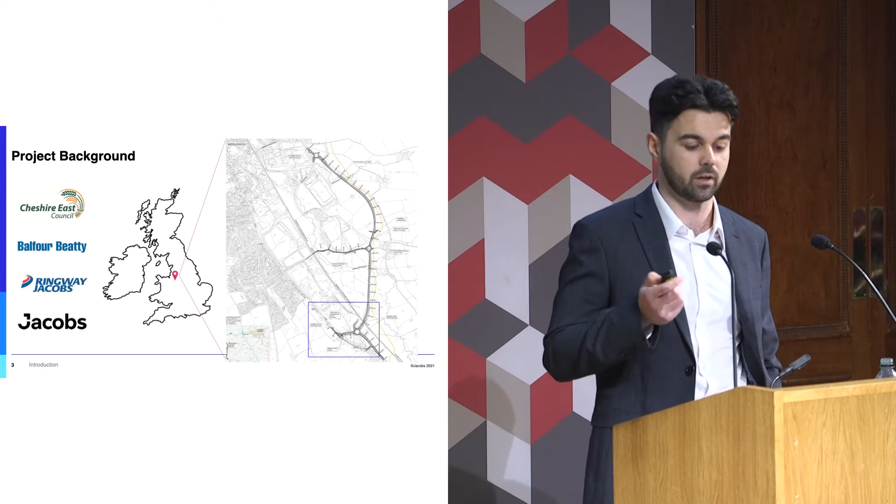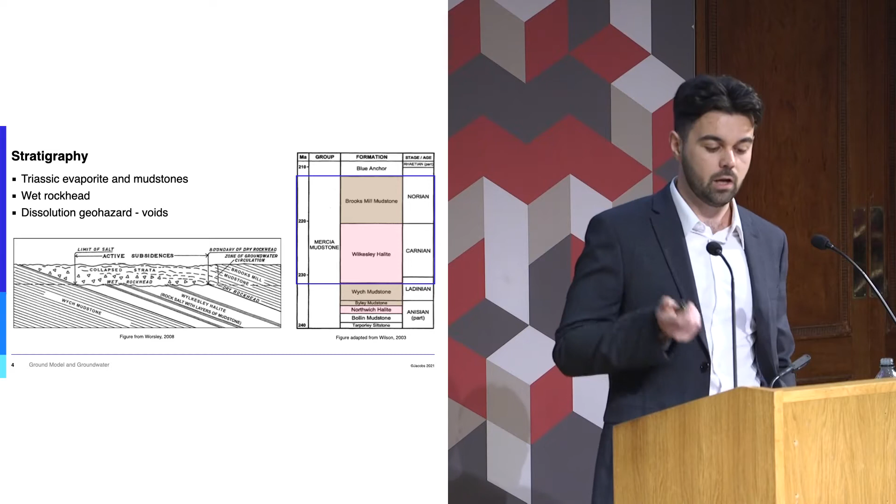So a bit about dissolution then. There are 5 main karstic rocks in the UK. They are dolomite, limestone, chalk, gypsum and salt. That diagram on the left-hand side there shows in the Cheshire Basin we are underlain by Triassic salt and gypsiferous rocks. If you just go to the right-hand side of that same diagram, you can see that salt karst and gypsum karst have the highest dissolution rates and increased dissolution as well.

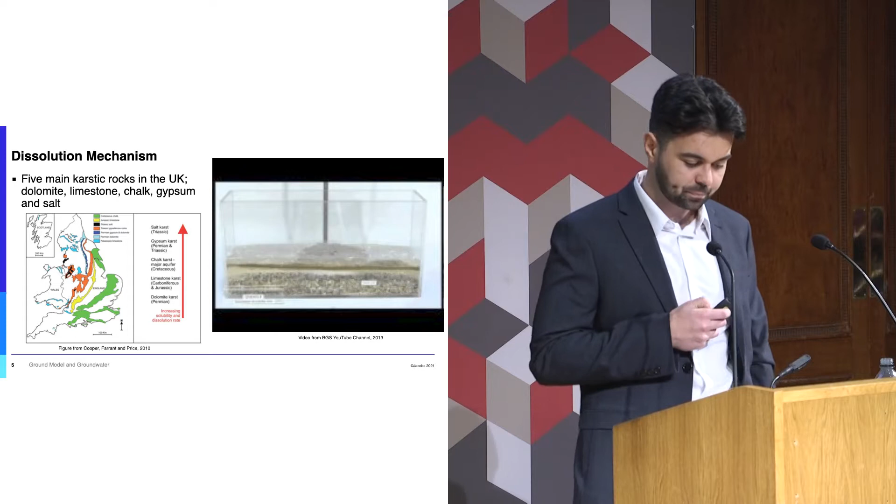To quantify this a little bit, halite has a solubility of about 350 grams per litre, which is 2 orders of magnitude higher than gypsum and 3 orders of magnitude higher than limestone. A lot of us will probably know this already subconsciously. If you've ever put salt in your sibling's glass at the dinner table, it disappears pretty quickly. If you did the same with limestone, you'd probably get a whack round the head.

For everyone else who's well behaved at the dinner table, we have a video on the right-hand side which may show this. Hopefully that works. Oh no, it doesn't. Basically, that video would have shown with similar ground models what we have at Middlewich.

Oh, perfect. Thank you very much. Could you mind muting that? Sorry, I'll explain over it.

Thank you. So a similar ground model to Middlewich. We have sort of a granular layer above this sand, which would represent the Brooks Mill mudstone, and we have this white layer beneath, which would obviously be our Wilkesley halite. And as fresh water is introduced into the system, you can see that the salt disappears and that void space is occupied by the overlying strata and there is surface deformation. I'll just let that play out. Thank you.

We also did a bit of a quick experiment on site. We had 2 lumps of similarly sized core samples from the Wilkesley halite. The sample on the left there was put into a bucket of brine, and the sample on the right was originally the same sort of size and was put into a bucket of fresh water. After a couple of hours, we came back, and obviously the results speak for themselves there.

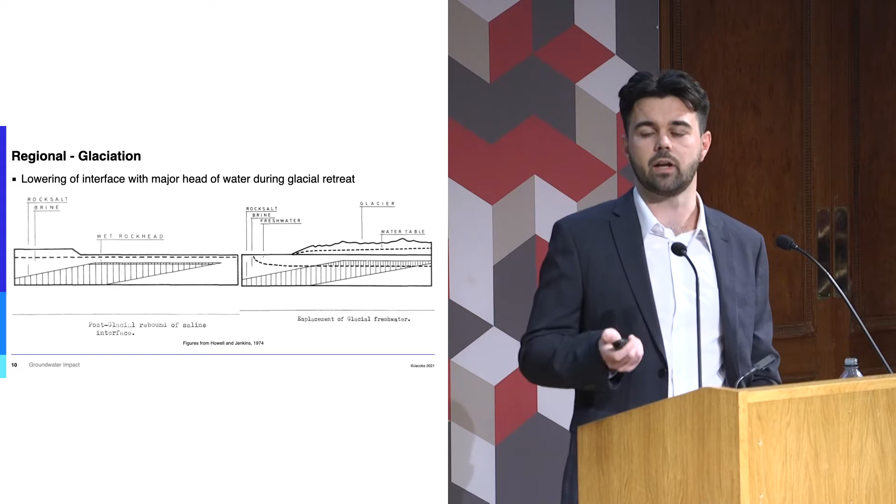There is the water table, and the groundwater head of water was sufficient enough to push the brine interface down to deeper levels, exposing a lot more of the halite to dissolution. These would then cause, like I said before, more voids, more collapse, more surface deformation.

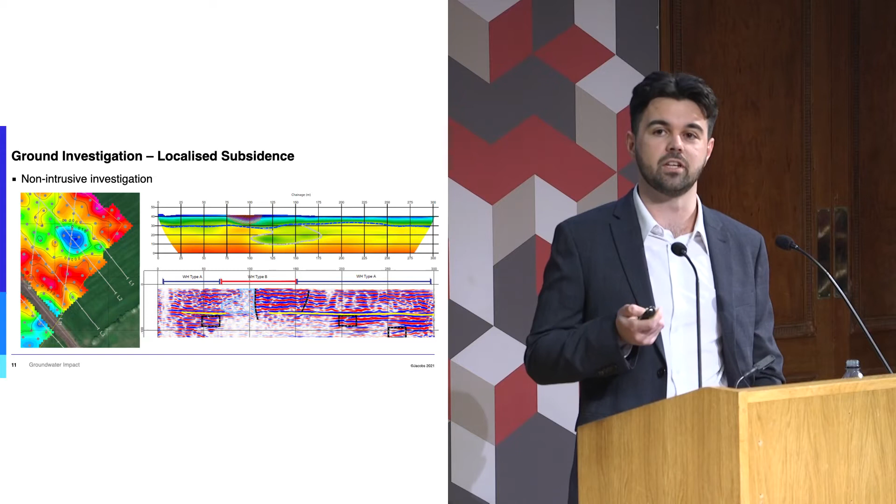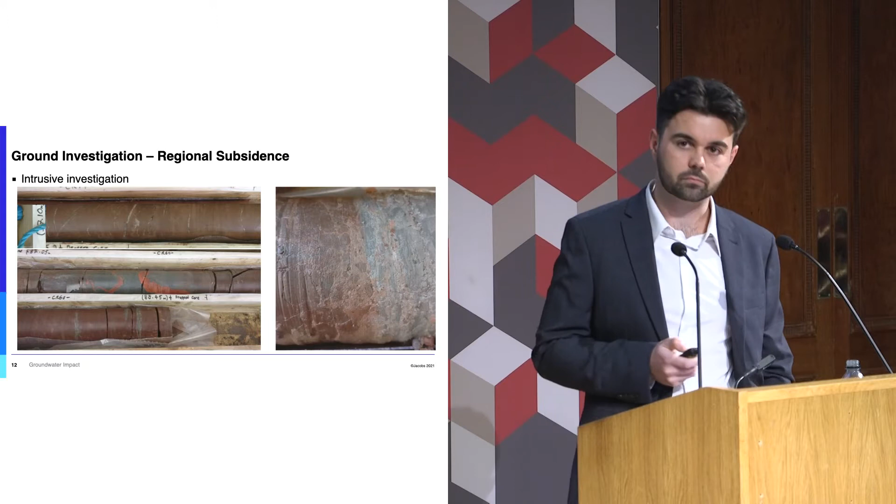Just a bit of a recap then of what I've said. Regional dissolution has occurred, and this has caused the majority of the collapse breccia. And there's also anthropogenically induced dissolution, which has possibly led to localised subsidence features across our site as well.

So, fortunately, we have found no evidence of pre-existing voids, which was our main worry at the start of the GI. But how about the future? So we have previous dissolution methods and mechanisms. How do we assess the impact going forward then? Well, to do this, we use Hutton's principle of uniformitarianism. The present is key to the past, and in our case, key to the future as well.

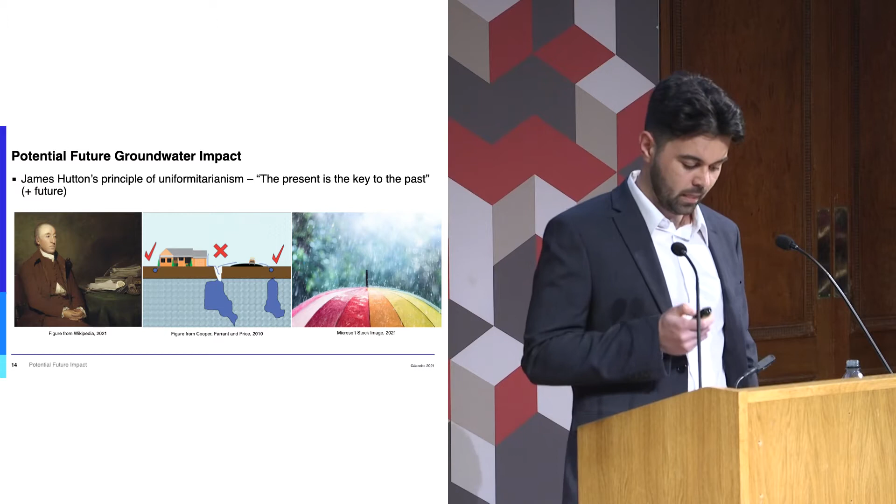We know that in the past, the main mechanism for dissolution and surface deformation is the alteration of the protective brine blanket. So what is our design going to do that could potentially alter this blanket? I think Tony Waltham said in the 2015 Glossop Lecture, control the drainage. This is something we can control as part of our design process.

For example, we've been in communication with our drainage team quite a lot, and we've said SuDS ponds have to be lined. Under no circumstances are we to have soakaways that lead directly into the ground surface. We used brine during our ground investigation as a flush, and we backfilled any boreholes that penetrated into the Wilkesley. This is just to reduce the easy pathways for fresh water to percolate down to the halite.

We're also in a difficult period of dynamic climate change at the moment. There's a lot of unknowns that we have to try and factor into our design as well. Again, we've been speaking with our drainage team, and they've accounted for a 1 in 100 year event for capacity for all our culverts, all our flood compensation areas, all of our drainage ditches.

However, we've also factored resilience into this in terms of climate change, especially in the northwest of England. It's already quite a wet region. Surface water availability in the next 100, 120 years is an unknown. So they've actually factored the designs by 1.35 on top of this as well to account for any excess rainfall in the coming years.

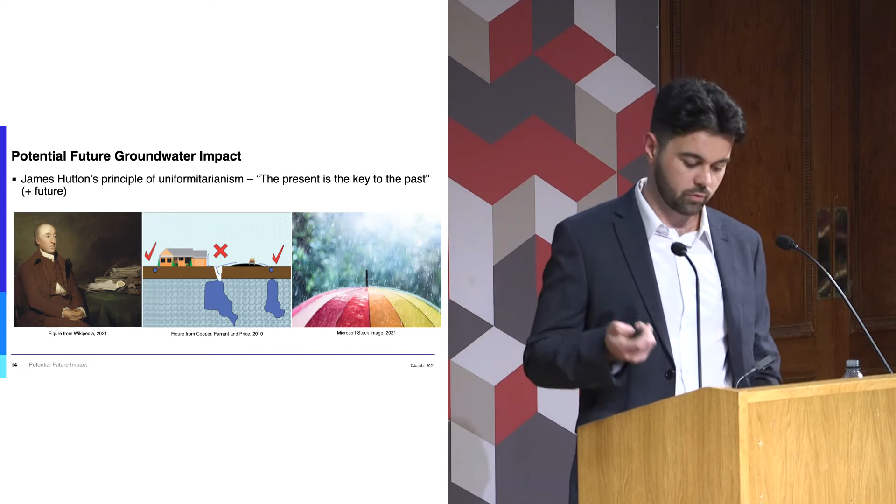So just to summarise, the impact of groundwater has been profound on Middlewich. The changes in the groundwater regime have led to dissolution of the Wilkesley halite member. In turn, this has caused collapse in the overlying Brooks Mill, and our ground investigation broadly agrees with this hypothesis. And we have to acknowledge that there is always this latent background risk associated with soluble strata, despite controlling what we can in terms of design.

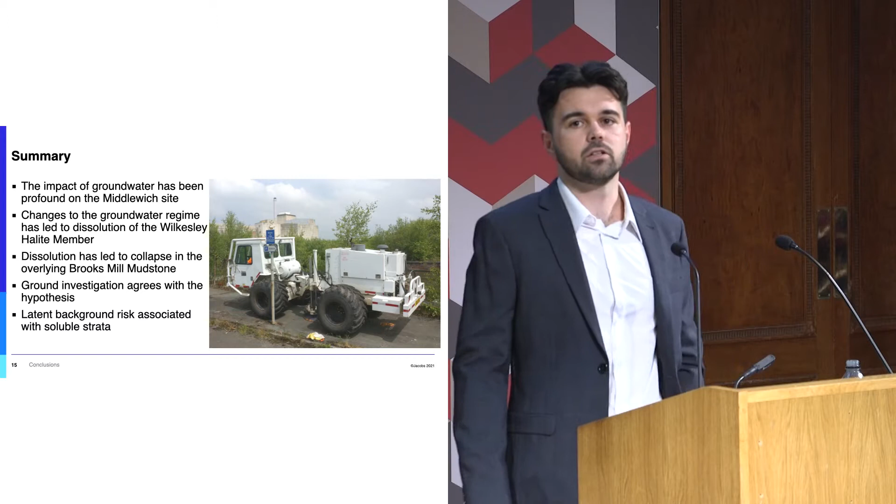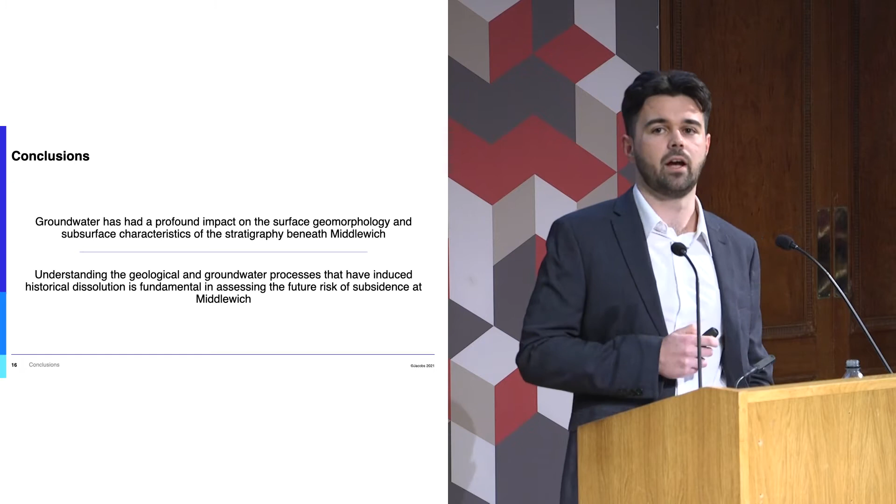So just to conclude then, groundwater has had a profound impact on the surface geomorphology and the subsurface characteristics of the stratigraphy beneath Middlewich. Understanding the geological and groundwater processes that have induced historical dissolution is fundamental in assessing the risk of future subsidence on our site. Thank you very much.

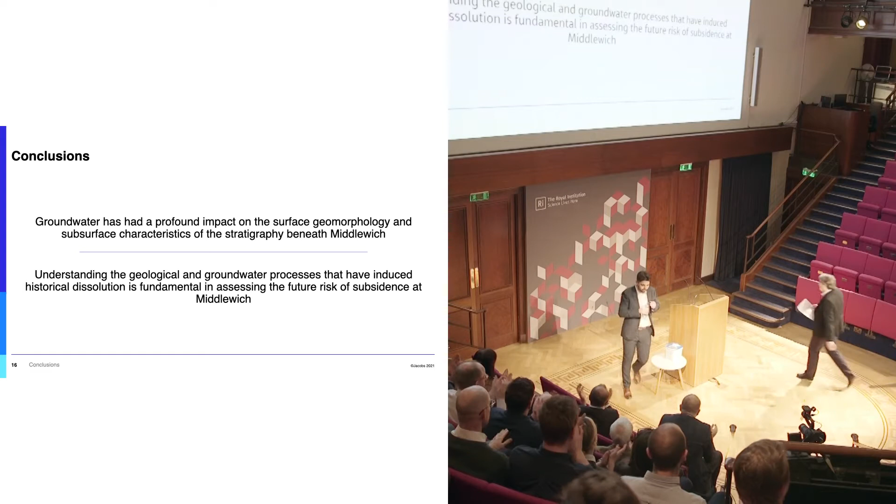Many thanks, Josh. I'm sure you'll all agree a worthy winner. The Engineering Group Glossop Medal Award is our Lifetime Achievement Award, which is awarded to somebody who's made an outstanding achievement to engineering geology. I'd now like to call upon Dr. David French, former Managing Director of Atkins Ground Engineering, to introduce the 21st Glossop Lecturer, David Shilston, Atkins Technical Director for Engineering Geology.

Good evening, ladies and gentlemen, and welcome to you all in this wonderful setting here. It is indeed an honour and gives me great pleasure to introduce to you past President David Shilston, who will this evening present the 21st Glossop Lecture. David has a working career as a hands-on engineering geologist that spans over 40 years.

After 10 years working for two major site investigation contractors, David joined the Atkins Geotechnical Division in 1988. I joined Atkins a couple of years later, so I've been a close witness to the rise of David's career and stature in the industry over a long period. He's been a great support to me in my career and in the development of the Atkins geotechnical community.

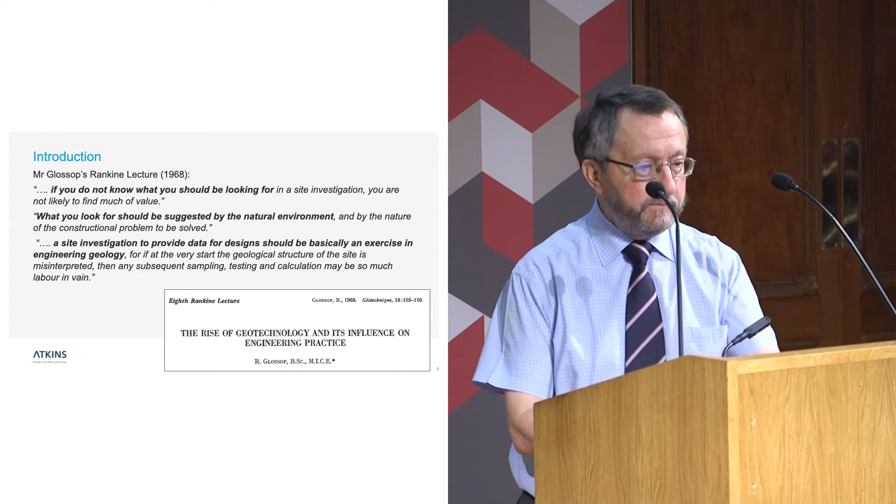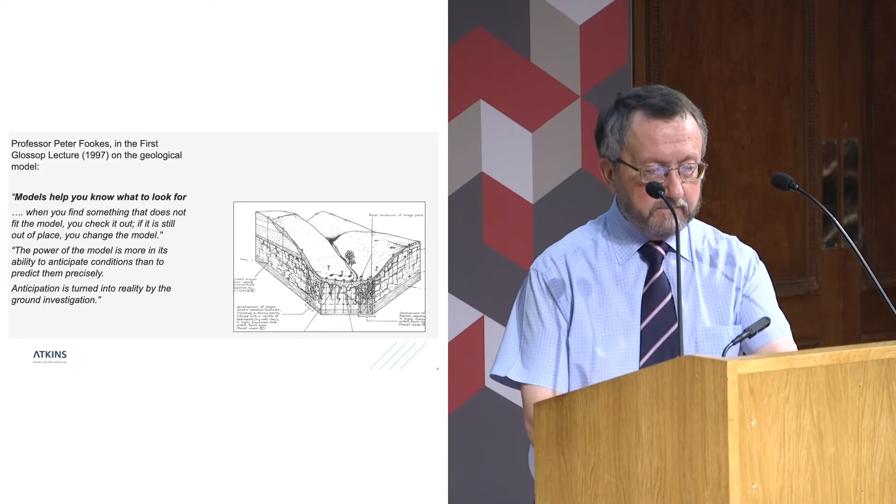Well, what is the time machine? What was it that got me going in this kind of way? When I was invited to become the Glossop Lecturer, and of course I accepted, I was given a fortnight to think of a title and what it's going to be. So this is what I came up with. Now, one of the underlying themes in the way I think about things is this book by Ian Mortimer, The Time Traveller's Guide to Medieval England. And I'm going to read you this little quote.

Imagine you could travel in time. What would you find if you went back to the 14th century? Imagine yourself in a dusty London street on a summer morning. The wooden beams of houses project out over the street. Painted signs above the doors show what is on sale in the shops beneath. Suddenly, a thief grabs a merchant's purse near the trader's stalls, and merchants run after him, shouting. Everyone turns to watch, and you are in the middle of all of this.

And what Ian Mortimer says is, as soon as you start to think about the past as happening, as opposed to having happened, a new way of conceiving history becomes possible. So the idea of the time machine is that you go to geology where it is happening, and it helps you understand it.

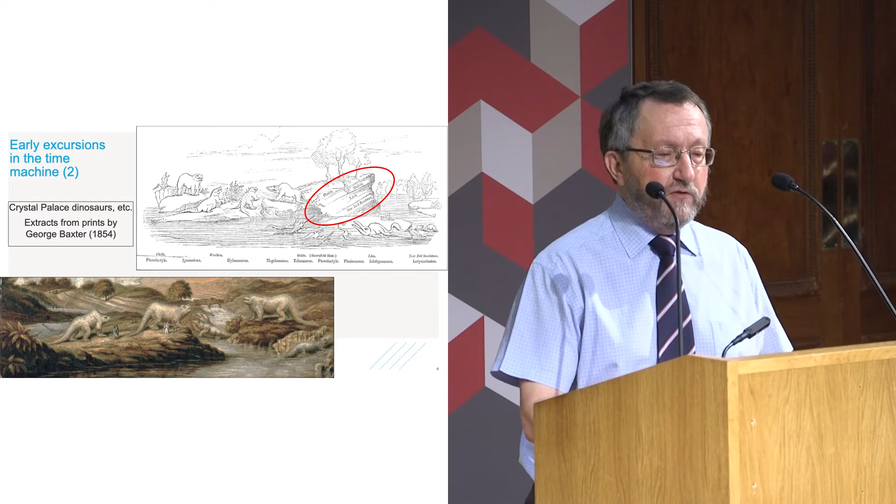A couple of decades later, a Victorian could visit the past. These are the Crystal Palace dinosaurs on the southern outskirts of London. And so a Victorian could get out of the train at Crystal Palace station and go and stand by these reconstructions of prehistoric animals from the past. So this is a Victorian Jurassic Park, an attempt to reconstruct the past, including a reconstruction of the geology. Look at the red circle there. You can see the oolite, the lias, the new red sandstone. So this is an entire geological environment rebuilt, so time travelling by the Victorian public there.

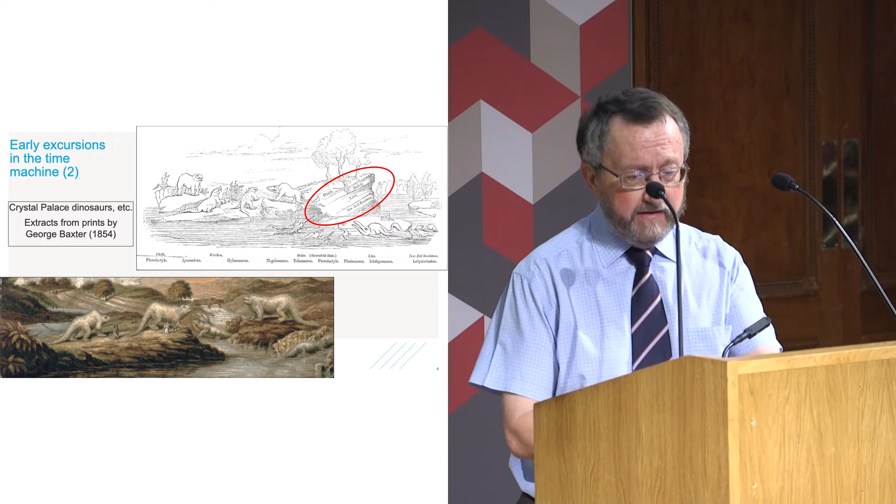But I also started to think, what is a modern example of time travelling? Have we done it in modern times? And then it suddenly occurred to me, yes, we have. Dr. Jack Schmitt is the only geologist to have visited the moon, did so in 1972, and spent 22 hours wandering the lunar landscape. The moon is a very ancient celestial body. The surface is many millions of years old. So in getting out of his time machine, in this case the lunar module, he is stepping back in time. And as he said when he gave a lecture at the Geological Society a few months later, man was there to see for himself.

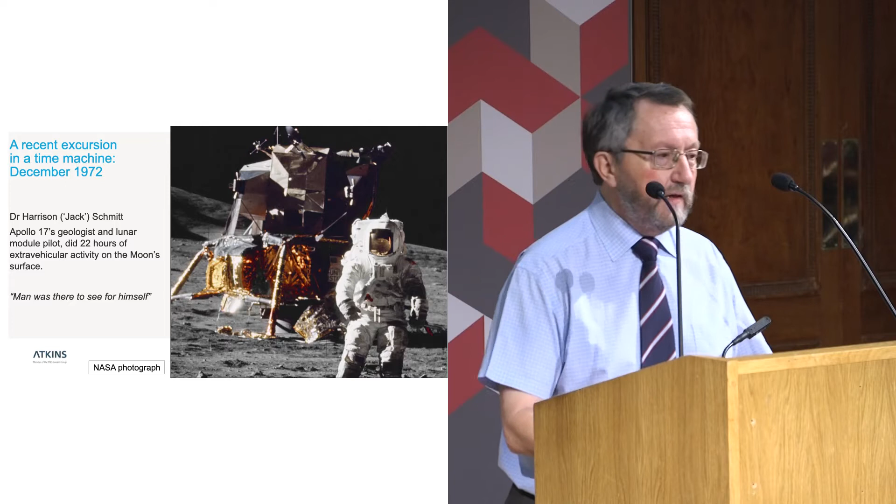So why do we want to use the time machine? I suggest to you that the geoscience time machine can be a tool in engineering geological practice. It helps us envisage, investigate, understand the conditions and the processes of the geological past.

When I showed an early version of my paper to a colleague, he said, but David, how do you use the time machine? What's the manual? What are the operating instructions for the time machine? Well, here they are. First of all, you must employ the fundamental principles that underpin modern geoscience. The law of superposition, the principles of uniformitarianism, Walther's law. And I'm sure you in the room here will have other laws that you think underpin what you do. You get out of your time machine and you say to yourself, where am I?

Am I on a hillside, in a riverbed, on a landslide, on a beach? And what is going on here? Can I understand this environment in terms of geological processes and geological materials?

Then, using our normal techniques as espoused by Professor Fookes and many others, develop a model through field observation, through mapping, through understanding the regional and local geology and so forth. And you take this understanding, you take it back today, and you apply that to your geotechnical engineering and your engineering geological work.

So in my lecture tonight, I'm going to go through a few case history examples. We're going to go to the Lambeth Group strata in London. We'll talk fleetingly about Alfred Wegener and continental drift, visit a karstic limestone, a British earthquake, some gas pipelines in the Sahara. We'll go mammoth hunting in Sussex, and we'll end up offshore at a wind farm.

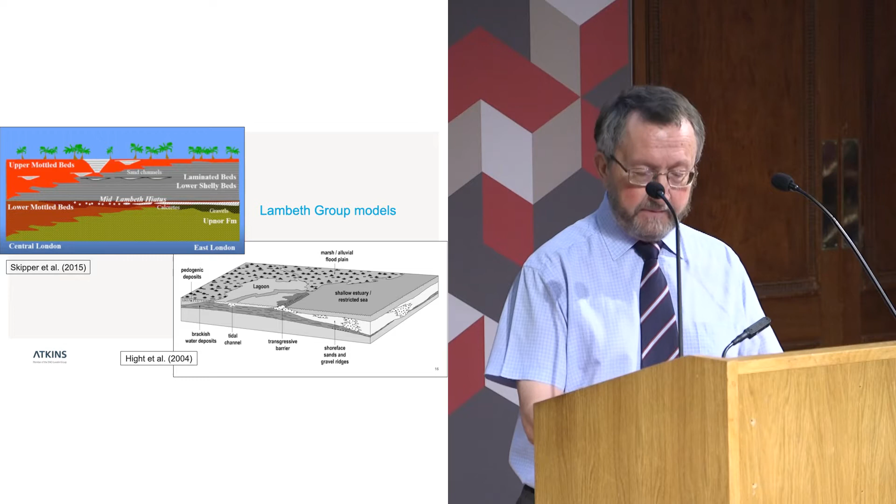But also, you can look at the Lambeth Group by getting close to it. You could dig a tunnel. So this is one of the Thames Tideway tunnels, and Tim Newman kindly got me permission to use this photograph, and it shows the mid-Lambeth hiatus, which is that red arrow. So beneath it is the calcretes, and beneath that are the tropically weathered soils, those multicoloured soils that are so famous for the clays within the Lambeth Group.

So if you were to go where that red arrow is, you would be standing on the unconformity. You'll be standing on part of the former land surface or just below it. And the grey clays above are the marine clays that come in with a rise in sea level.

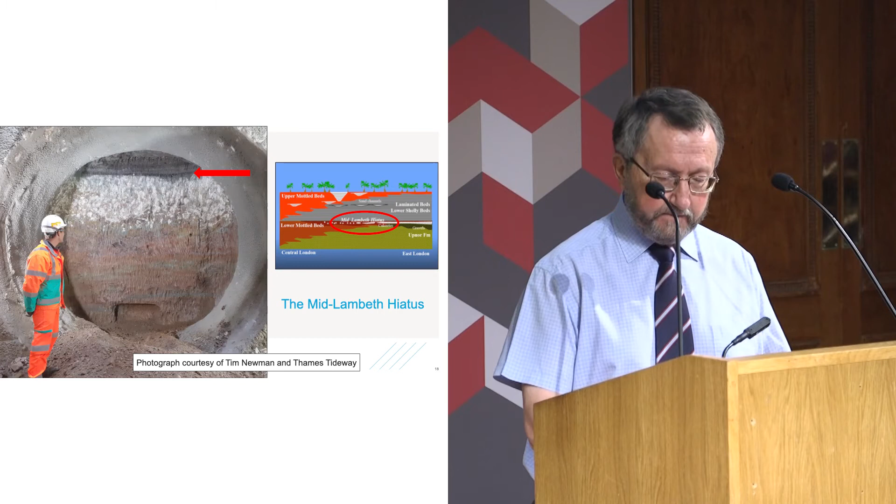And of course we have to think about the geotechnical implications of all of this. So I've taken these little quotes from the CIRIA report that I've mentioned previously, and it's got many chapters on various aspects of the engineering of the Lambeth Group. But here I'm talking about deep excavations and dewatering.

And I believe that the time machine approach, placing yourself back there in time, in your mind at least, will improve your ability to get design parameters, become more reliable. You make better estimates of excavation methods required, including the strength and understanding of the 3-dimensional disposition of the calcretes, and then the dewatering and groundwater conditions.

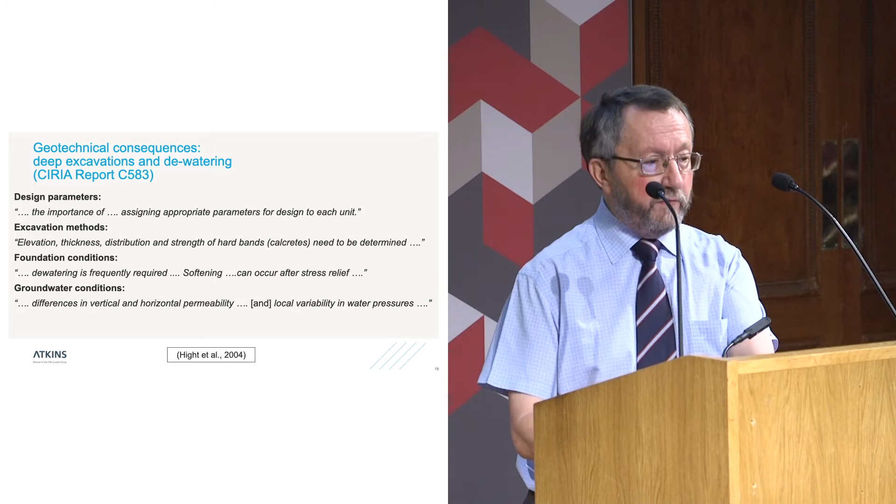So within the clays, which are very impermeable, are sand channels, which have radically different permeability. To understand all this in 3 dimensions, I believe getting into your time machine mentally and having a go will greatly improve your understanding.

So in summary, the geotime machine, in this case, enables the engineering geologist to have an improved understanding, to integrate and interpret the surface and subsurface data, to increase the reliability of what we do, and particularly the design parameters, and reduce uncertainties in the assessment of ground risks and the assessment of opportunities. Geology isn't always about finding problems, it's about finding solutions.

So say you take that tunnel, the Tideway project had to have a tunnel there. But if you had a choice, you could put the tunnel above or below the calcrete. But you've got to understand the calcrete in order to be able to avoid it.

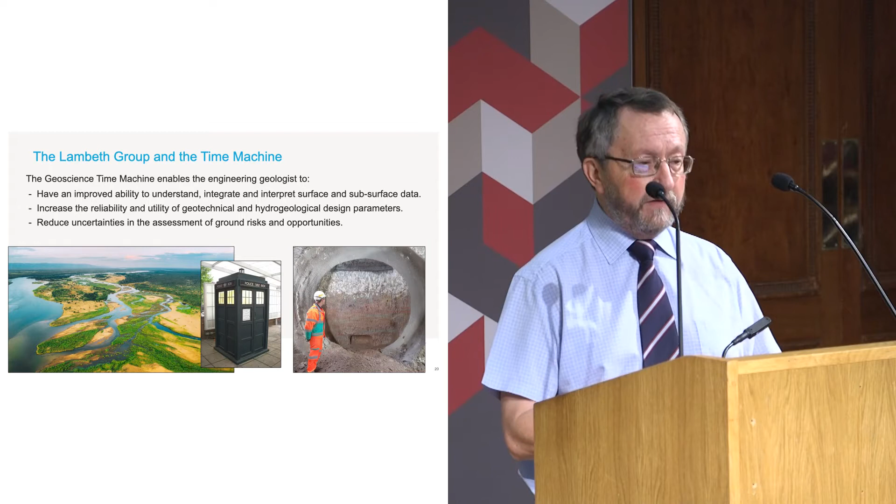Alfred Wegener was writing before the Second World War in 1929. And I happen to own a copy of his 1929 publication, translated into English. It's the most beautiful, excellent translation. He must have written very well. And I'm very proud to say that my copy of Wegener's translation was given to me by Professor Fookes, so I keep it in a special place in my bookcase.

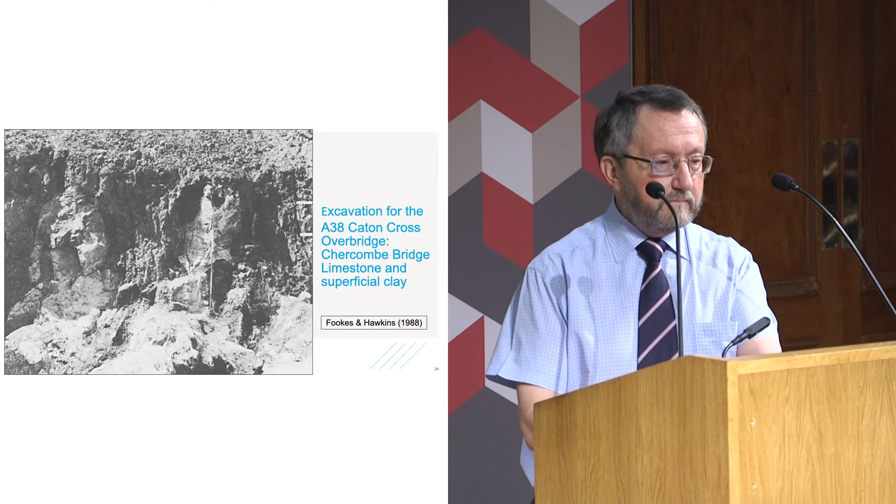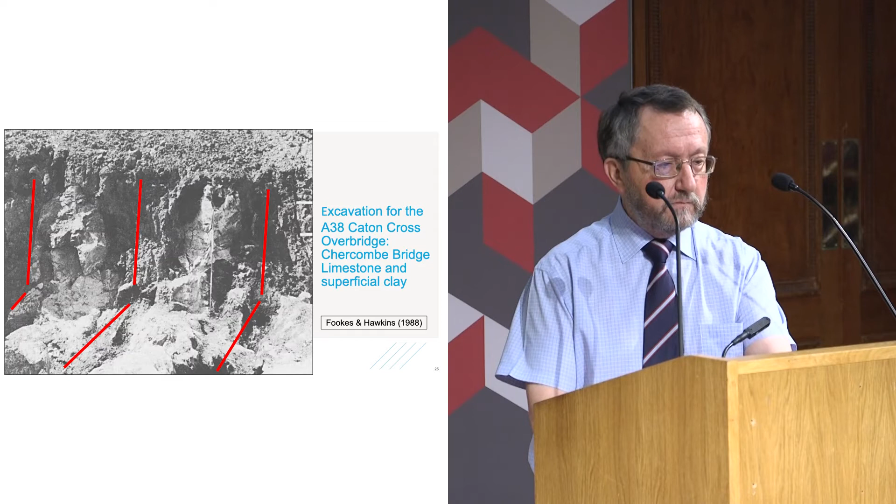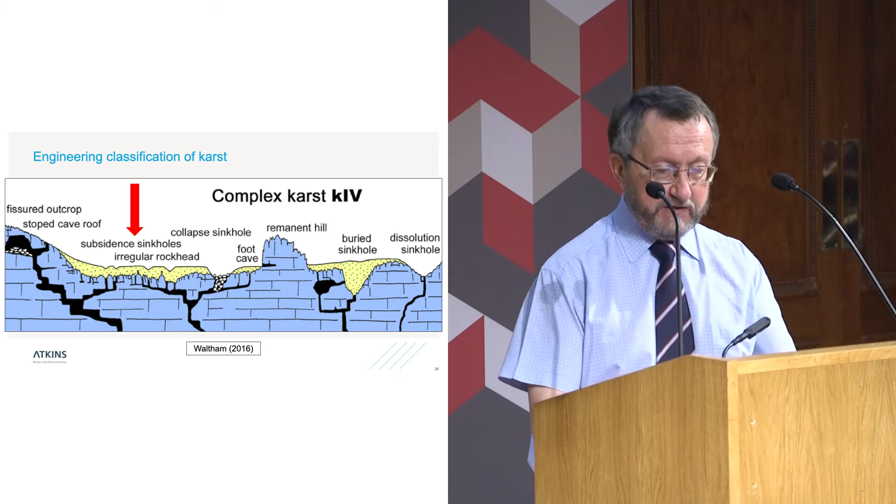So if we zoom in, this is the conditions that we're talking about here. An irregular pinnacled rockhead overlain by superficial deposits and the weathered residue of the limestone, and then sinkholes forming above the cavities.

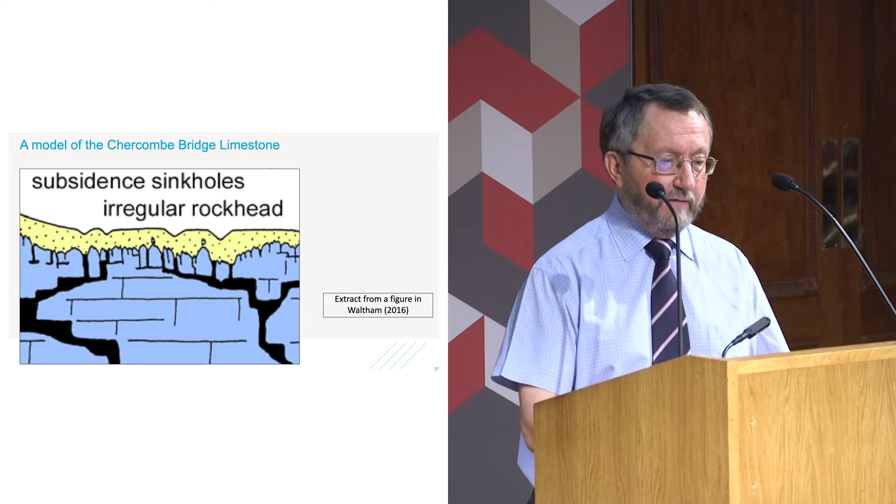Now, the limestone is Devonian in age, so it's of considerable geological antiquity, but now it's near the surface, and for some geological time in the past it has been near the surface. So I want to take us back to the Tertiary, which, as we've seen, with the British Isles is in a tropical condition or subtropical.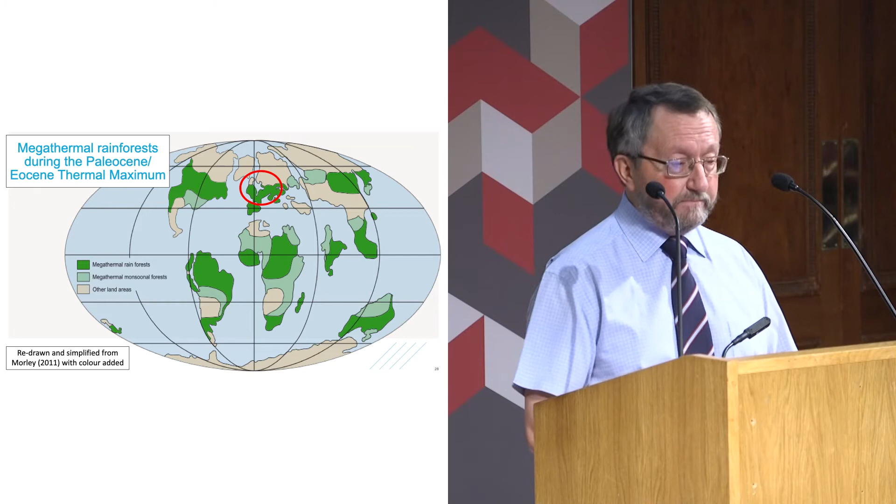But after the Tertiary comes more modern times, and in the last 500,000 years or so, we've had at least 4 really big glacial epochs. So our landscape has been subjected to a glacial environment. Now, that part of Devon, that part of southern England, was never glaciated. It was always in a periglacial zone. So for a considerable number of thousands of years, that landscape was in a periglacial condition. So you think periglacial, you think solifluction sheets, that kind of thing.

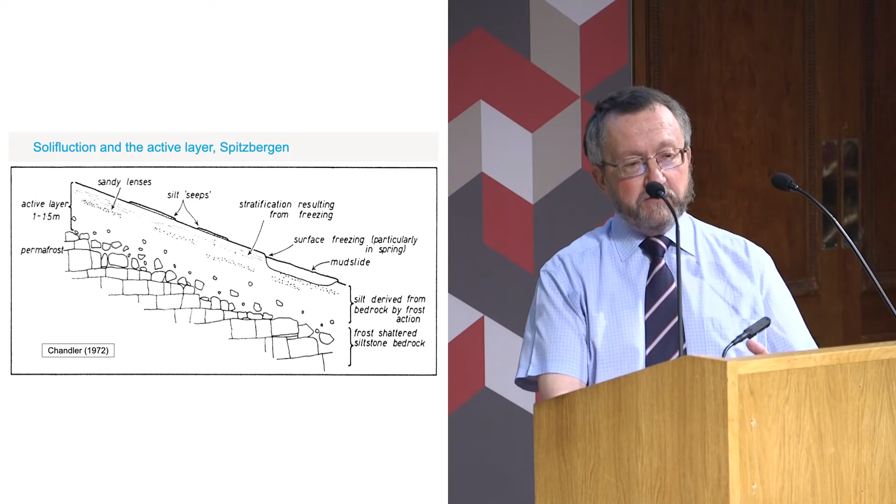This limestone only has massive, crystalline, slightly metamorphosed Devonian limestone, which has been tectonized. So what is going on here? If we look at the next slide, the paper publishes one borehole log, and this is 52A, the one I drew your attention to earlier.

And as you can see, we've used the same colouring, so limestone is blue, the clay layers are this grey colour. But if you zoom in and look at the clay layers, look what the description says. Firm brown clay with fragments of shale, sandstone and limestone. Where's that shale and sandstone come from? They've come from upslope. They've come from the slope wash, from that solifluction, from the periglacial conditions.

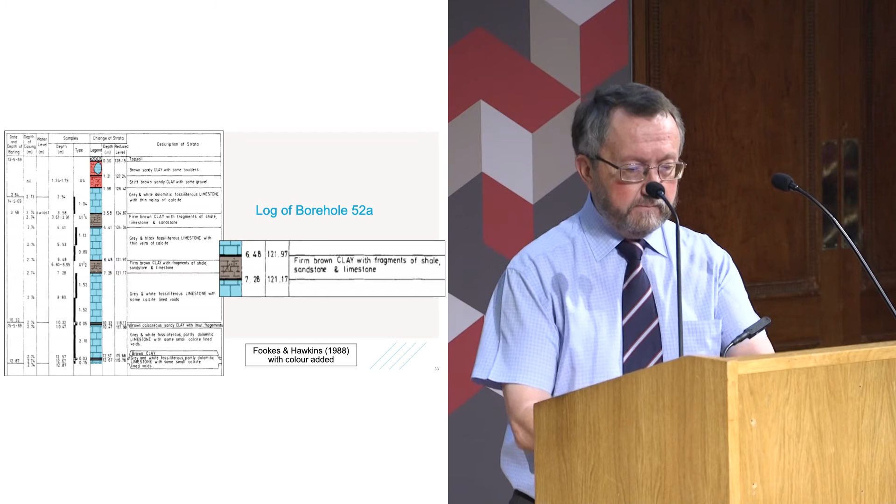So when you think about where we would take the time machine, you can imagine getting out of your time machine at Rockhead, rather like that example from New Zealand, thinking about those conditions, and then thinking about those conditions that I showed you in Alaska, thinking about how superficial deposits have come over and blanketed the karst, which is now hidden, but is still there.

Let's go somewhere else. This is Essex, which is in southeastern England. And this is the Colchester earthquake. So the Colchester earthquake is probably the largest onshore earthquake in recorded earthquake history in the British Isles. And I'm using this example because I want to talk about the use of historic documents. So we're not going back far in time, and we have documents to think about.

And the reason that I was working on this project was that I was a lowly member of the Central Electricity Generating Board's Seismic Hazard Working Party, which was led by the late Dr. Brian Skipp, who passed away only recently. And the CEGB wanted a reassessment of the UK earthquakes in order to reassess their functioning nuclear power stations, to check that they were sufficiently well designed for the kind of earthquake that modern science would estimate would be there.

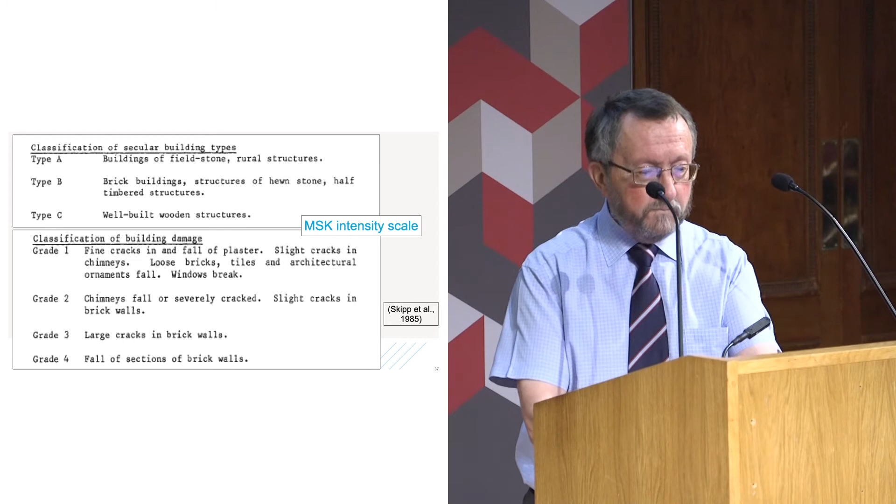You then need to classify the damage. Fine cracks, fall of plaster, windows breaking, that kind of small damage, grade 1, right through to grade 4, sections of brick walls falling, or grade 3, cracks in big brick walls. So you can contour your assessment of the impact of the earthquake. And the contours are called isoseismal lines, and you can see here.

So the epicenter of the earthquake is intensity 8, and that's right by Colchester, and the effects were felt right out to beyond Birmingham. So in Birmingham, intensity 3, you'd have to be in quite a sensitive position to feel that. You'd have to be lying down or sitting down. Intensity 4, which goes through London and Cambridge, a lot of things would rattle, perhaps things would fall off shelves.

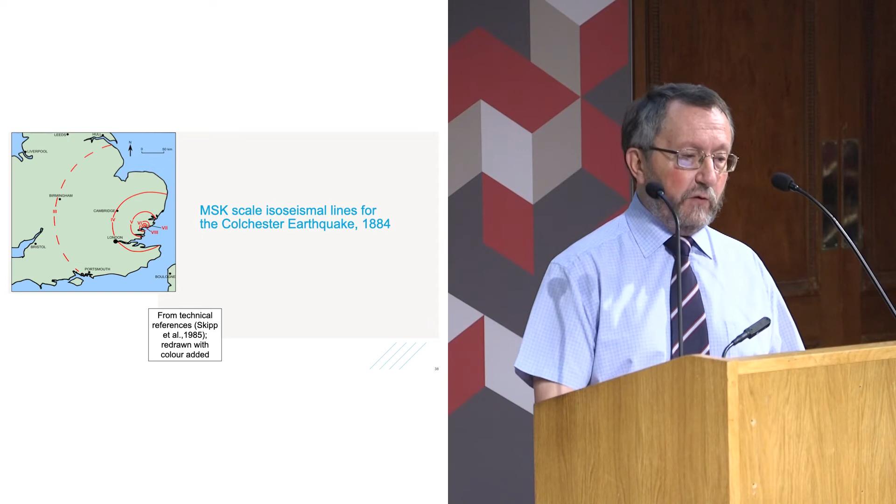On the right here, we have a zoom in of the individual results for individual villages. Now, we assessed two types of data. The first type was reports in newspapers. There's an enormous amount of newspaper reporting in the Victorian period, but the problem is it's quite flamboyant, just as in newspapers today. There's an inevitable exaggeration because they're trying to sell the newspapers. So it's quite difficult to evaluate reliably the intensity of an earthquake from a newspaper.

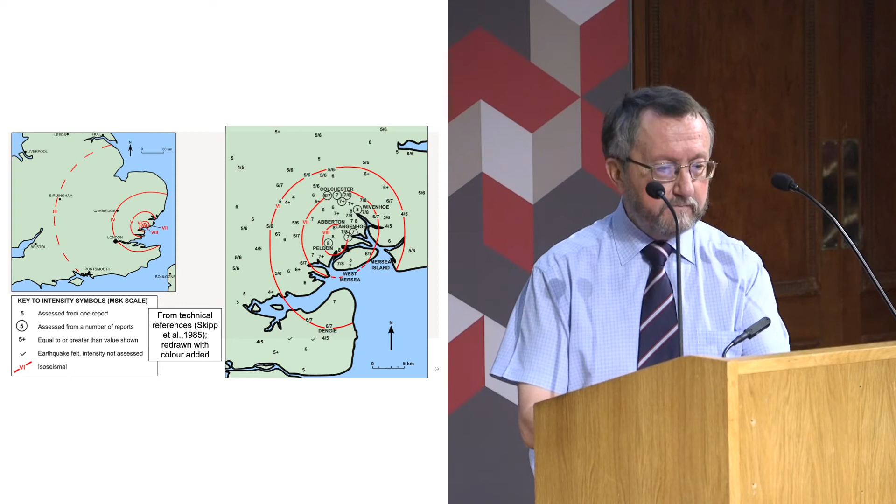But for this earthquake, we had a number of properly prepared scientific assessments, including one by gentlemen Meldola and White, who did a study in the immediate aftermath of the earthquake. And you can see, I hope from the map on the right, that the epicentral area isn't at Colchester, which is slightly up in the centre of the drawing, but is around the village of Peldon. So one thing I did was to go down to Colchester and look at the building stock.

Because in order to understand the individual reports, we had to understand the buildings properly, beyond the level that I've described to you in the MSK scale itself. And I defined 3 types of building. So there's a timber frame building, think of an Elizabethan timber frame building, something like that, which has plaster, rendering, weatherboards, called that type X.

Then we have type Y, which is a timber frame building that's been upgraded by someone, the owner, who wants to make it look more modern. And more modern buildings are made of brick, but for whatever reason, that owner didn't want to knock down the existing building. So they clad it, they made it look like a brick building, but underneath it's timber.

And this is not a good mixture of characteristics, because the timber frame building in an earthquake will wobble, rather like a wobbly dining room table. But the brick veneer is very fragile, and will peel away when the timber bashes against it. So we're looking at a very vulnerable structure here. And this is the type of structure that produces very photogenic images or sketches in the record.

And then we have brick buildings. So these are modern brick buildings, modern villa style. Remember, we're talking of the 1880s, villa buildings, schools, public buildings, something like that. So these 3 types of building behave in a very distinct way.

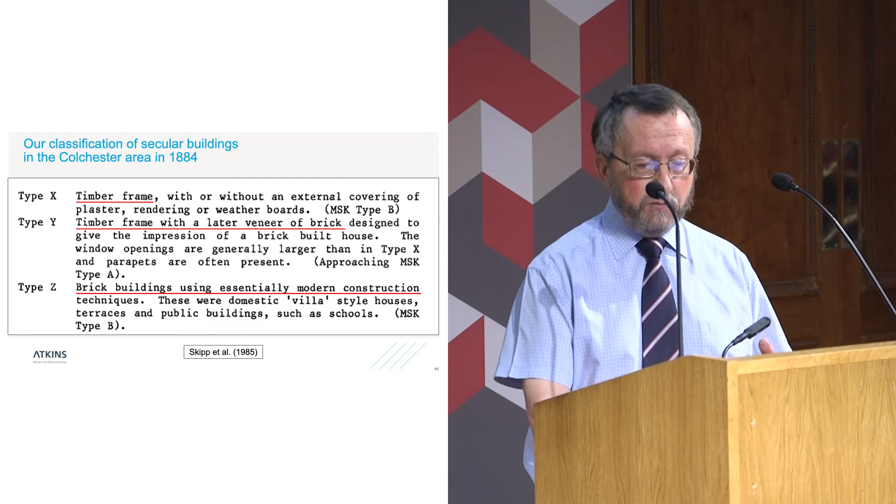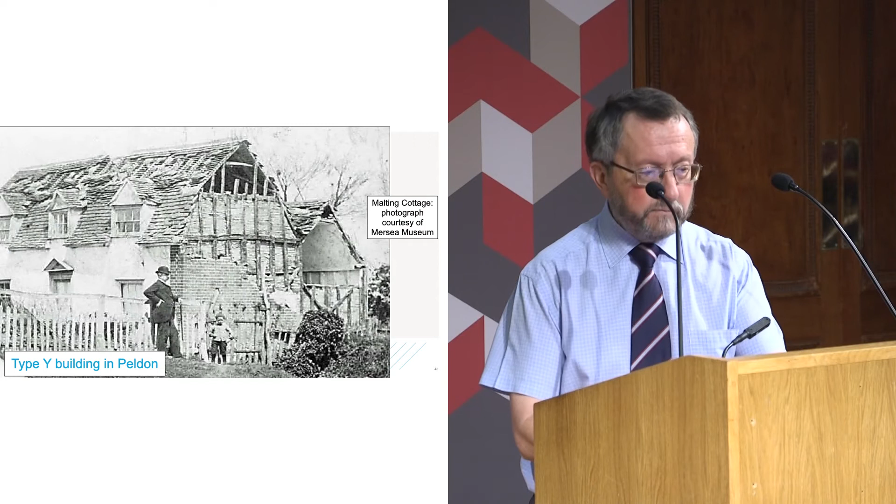But this is a villa. This is Strood Villa, also in the epicentral area, a type Z building in Peldon. Looks okay, but let's zoom in. So look at the chimney stack. It's been wrenched. Wrenched is a commonly used word in earthquake reports. The chimneys were wrenched. But also look at the parapet above the door. It doesn't look too badly damaged until you read Meldola and White's description.

So the Strood Villa in Peldon, one of the worst cases of destruction that came under our notice. The building, although modern, 24 years old at the time, substantially built of brick, was without exaggeration wrecked. So there were a few examples like this in the epicentral area that enabled us to pin down with much greater certainty the intensity. So when we assessed intensity 8, it had a much better certainty and reliability.

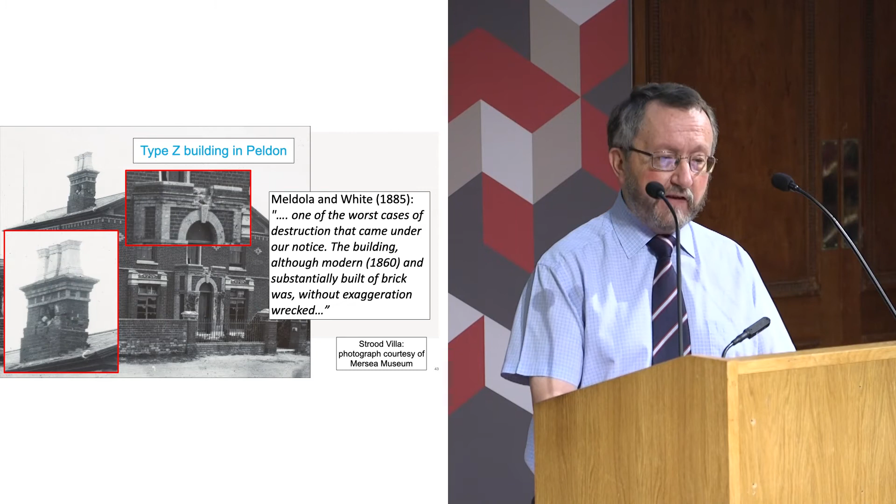But the other thing we need to think about is the social context of Colchester at the time, in 1884. And we wrote in the paper, which was led by Brian Skipp, the earthquake arrived after a long period of economic decline of the entire district. Impact was hard felt, particularly on the self-employed artisans whose homes and means of production were damaged. So the whole area was going through a bad time. What does that have with regard to the maintenance of these buildings, whose damage we're trying to assess?

And looking at a bit more detail, the town of Colchester itself was run down. It was prosperous in previous years, but by the mid-1880s, it had become a rather sleepy country town, we wrote. And the countryside was also in decline. The 1880s was quite a long period of deep agricultural decline in southern England and in other parts. So to go back, the town and area around Colchester, including the epicentral area, was not in good heart when the earthquake took place. So this was also fed into our understanding. We place ourselves back in time to understand the context of the scientific data that we are gathering.

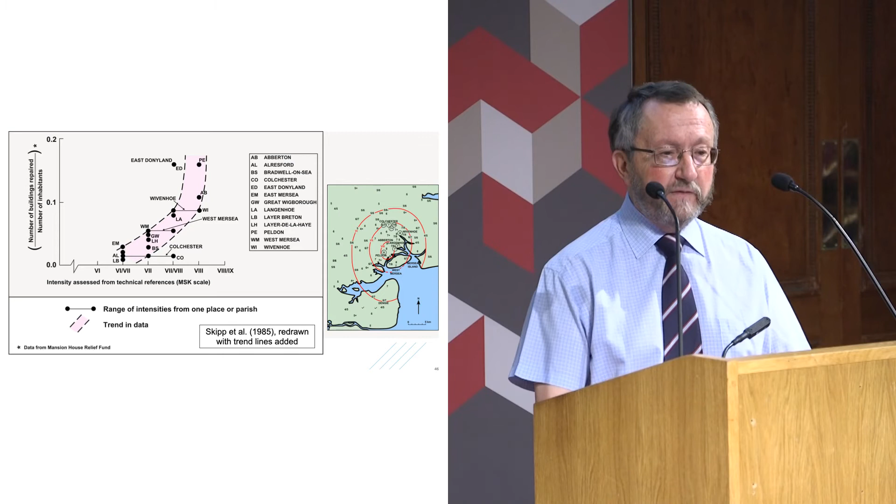And we can use this kind of understanding of the past through historical records on geo-environmental projects, if we're investigating, shall we say, a former steelworks or a gasworks. To understand where all the components of that factory and manufacturing plant were is really important. And to place ourselves back in time when they were making town gas, for example, will help us understand the ground conditions.

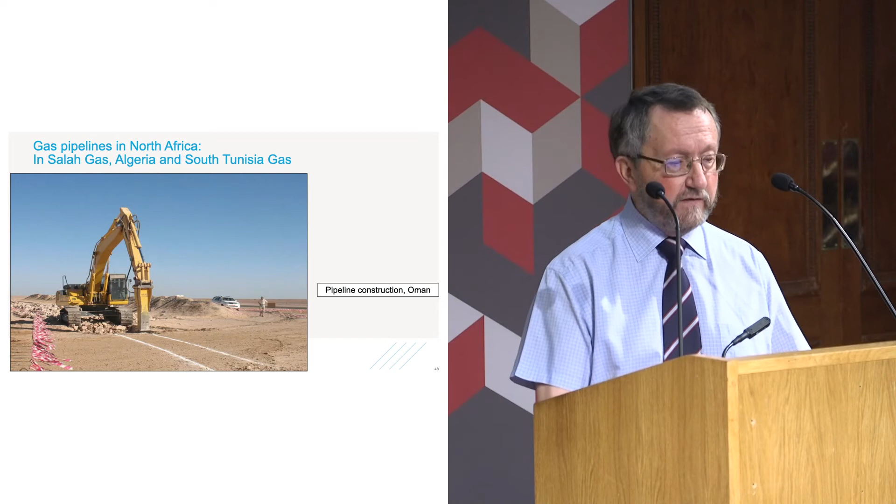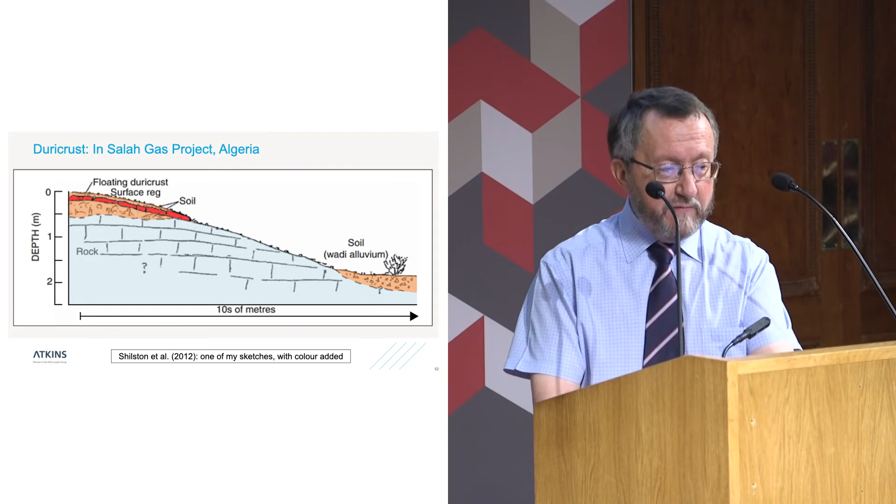So we can return now to the Lee et al. paper, and later on in the Tertiary, the Atlas Mountains occur on the northern coast of Africa, widespread erosion, and then savanna, more humid conditions. So we're looking at a different set of conditions, more humid, higher water tables, and the formation of another layer or another generation of ferricrete and silcretes. And it could be that the examples I've shown you from that In Salah project are from this period in time.

But not only that, when you have a higher water table, you start to trigger different earth surface processes. You very seldom get landslides in a desert, but in a savanna with high water tables and storms, the landslides become reactivated. And understanding the activity and the behaviour of landslides becomes important for pipeline routing if you've got to take a pipeline up an escarpment or round the base of an escarpment, for example. And then, of course, desert conditions occur later on in the Tertiary, 7 million years ago.

But that's not the end of all the changes in the Sahara. In the last 230,000 years or more, there have been a series of humid periods. Now, this rather complicated graph, which I've put together from two separate sources, begins, if you look at the black lines, these are the oxygen isotope stages. So these are the oxygen isotope ratios from microfossils from the ocean. And they're dated, and the ratio relates to the temperature, whether it's warm or cold.

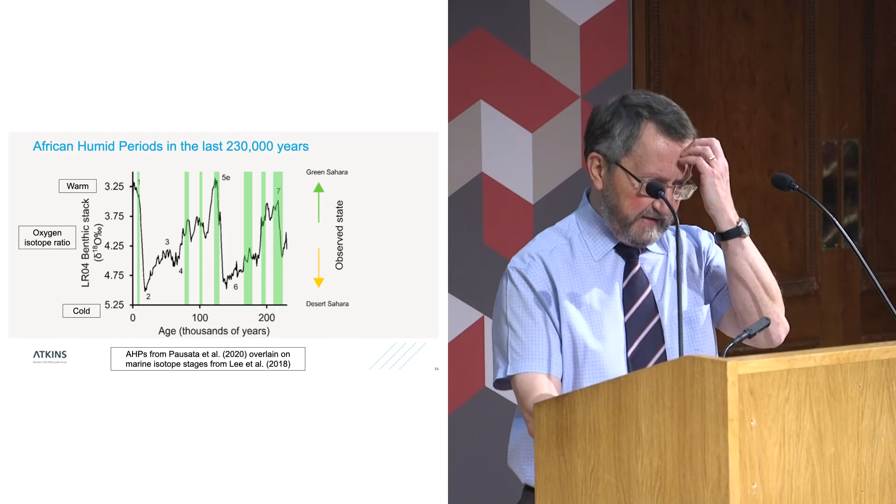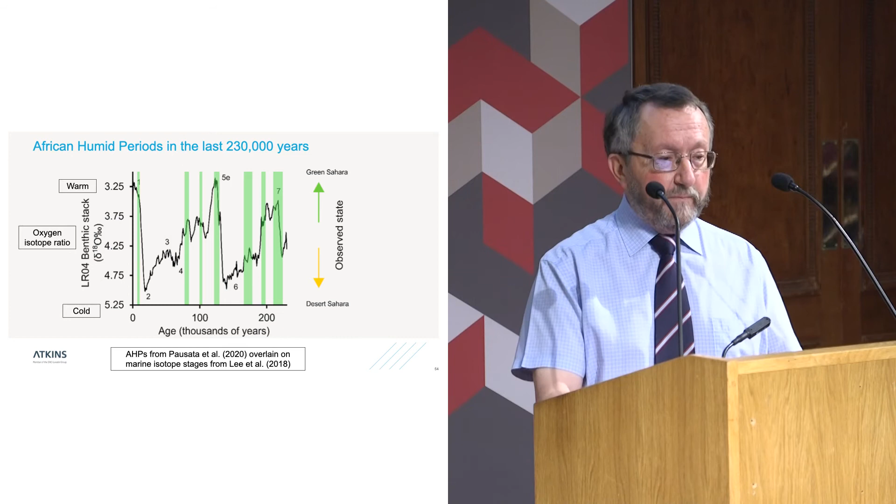And then on this I've overlaid the African humid periods when Africa was particularly humid, and this is the so-called Green Sahara. And they occur, as you can see, this is from the work of Pausata, almost entirely at the periods of warmth. So we're looking at a completely different condition. So if we go back to the last interglacial, what the European continental geologists call Eemian, we call Ipswichian, and this is about 125,000 years ago.

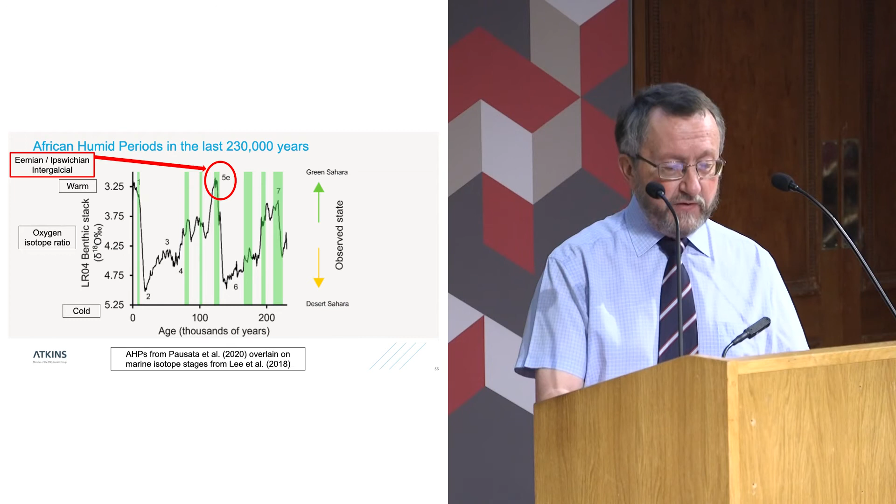If we go back then, we have, from Pausata's paper, a couple of maps here which we've redrawn, simplified, and then added colour to. And you can see in the present day on the left-hand side, we have the Sahara and a series of vegetational zones going south until you end up with a tropical rainforest on the equator or close to it. But in the Ipswichian, 125,000 years ago, in the Eemian AHP, it's very different. Notice the size of Lake Chad, for example. And notice that the bulk of the Sahara, including the two projects I've been talking about, are in wooded grassland, 10 to 40% tree cover.

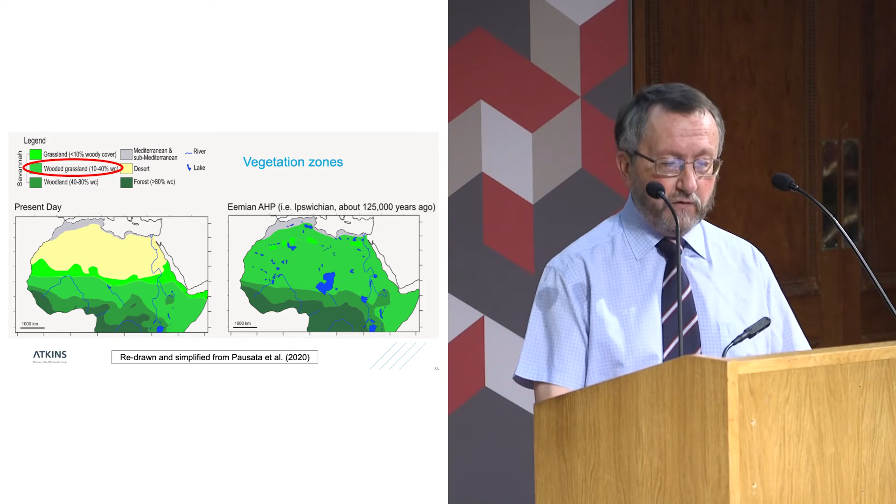So you could visit with the time machine deep in the early Tertiary, with these big slabs, maybe slightly later with floating duricrusts that follow the landscape, maybe in that later period. And then of course, we have these African humid periods and the effect that they've had on the landscape.

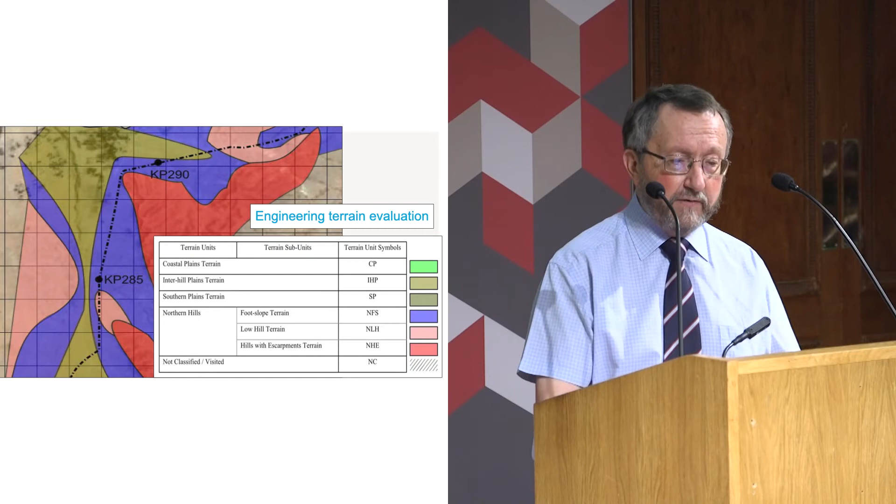On this map, we've coloured them up in different colours. You can see the rough idea of scale, the size of these terrain units, by looking at the kilometre points there: kilometre point 285, 290, 5 kilometres along that pipeline route. Then we can systematically assess the engineering characteristics, the geohazards, and the other characteristics of the route and the terrain using the terrain units.

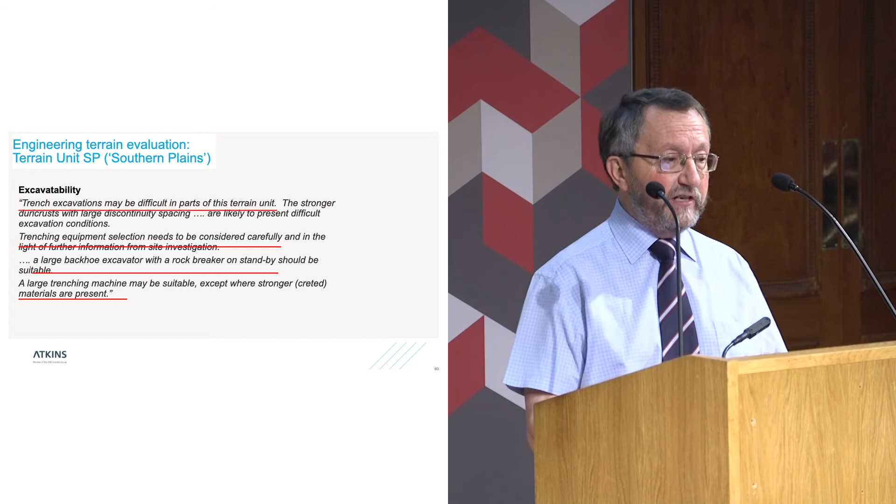So I've shown you here terrain unit SP, Southern Plains, which you would expect to have fairly good trenching conditions. I'm talking about excavatability here, not other things like the ability to construct a road or looking for borrow materials. This is just excavatability. And this is what we wrote in the report: trench excavations may be difficult in parts of this terrain. There may be stronger duricrusts. Trenching equipment needs to be selected carefully, and the site investigation needs to think about those.

We were doing reconnaissance level work. Almost certainly you're going to be able to excavate with a large backhoe excavator, but with a rock breaker of the sort I showed you from Oman on standby, should you encounter some of these duricrusts, which in this terrain unit were thought to be infrequent. You could also consider the use of large trenching machines, really big machines that excavate a trench, but do not like stronger materials, like cemented materials. So bringing this all together, you can make an assessment of excavatability.

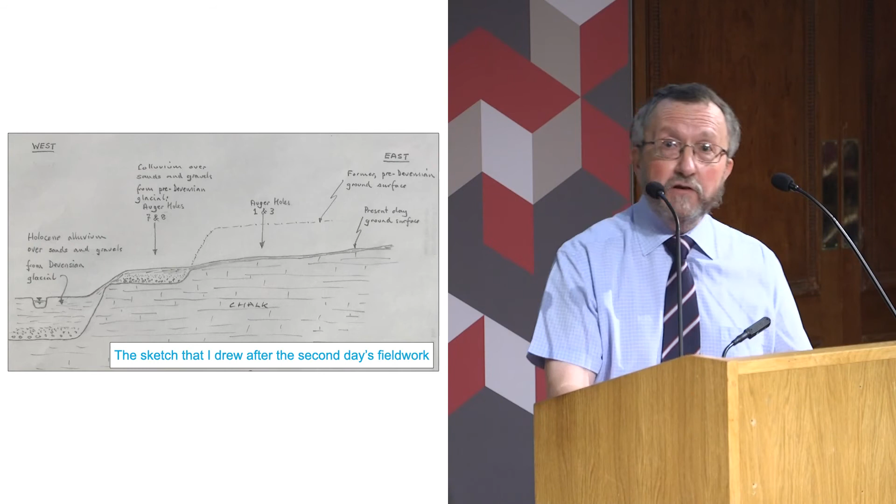And then, because I knew that there are a series of other terraces on this hillside, on the River Arun Valley, there must have been others rising up, which have no doubt been degraded away by that solifluction process. Because some of our other boreholes, you can see the one to the right there, numbers 1 and 3, just encounter chalk beneath the topsoil.

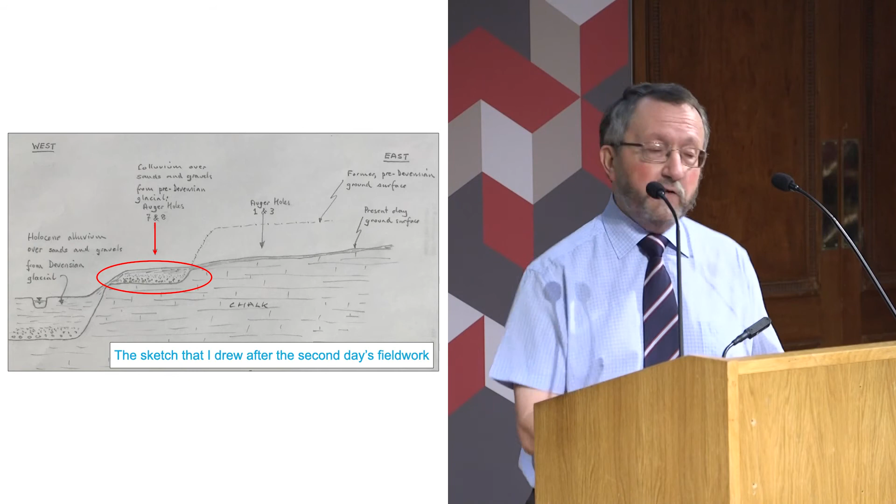My sketch was produced in 2017, and sometime later, I bought a copy of the great big thick Geological Society Engineering Group's publication on periglacial and recently glaciated terrain, the Working Party report. I'm delighted to find the paper in there by Murton and Ballantyne, which has this marked up and coloured up cross-section. And by taking my cross-section and getting rid of my outrageous vertical exaggeration, I was really delighted that what I'd drawn was broadly what they showed.

But even better than that, look in the red circle. Fluvial gravel, sand and silt, plus minus vertebrate remains. These are mammoths. These are Neanderthals and flint implements. We didn't find them, but that's for another day.

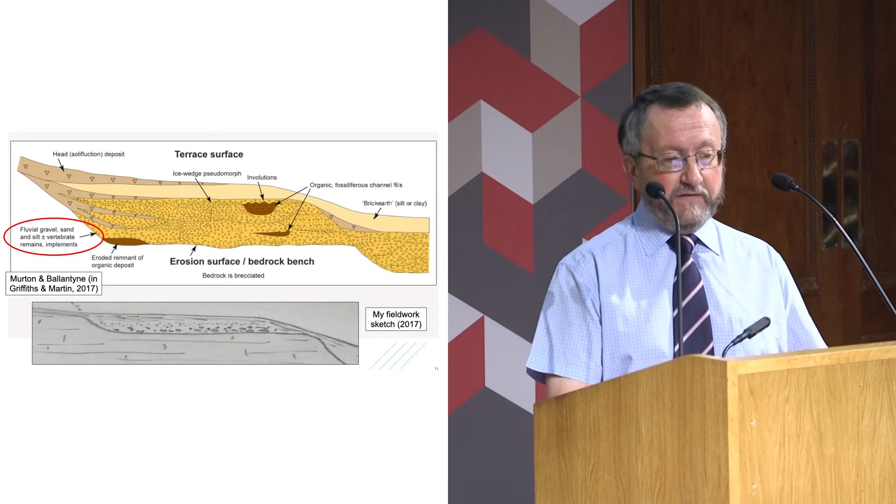Well, what has this got to do with engineering geology? Well, I'll give you some thoughts. The first one is that the multidisciplinary approach, we had a whole range of disciplines there, enabled us to achieve more than if an individual discipline had been there. That's a well-known truth, but it's worth saying we need multidisciplinary teams. The time machine enabled us to go back to the periglacial conditions and look at the modern conditions, and then it's going to help us manage the risk for ground engineering works.

Now, I have to stress that there is absolutely no intention whatsoever to develop that part of the Arun Valley. It's in the South Downs National Park, but I'm just using it as an illustrative example, if we investigate similar terrain somewhere else. The first thing is, there's a variable chalk rock head. Secondly, a localised occurrence of superficial deposits that are granular, the river terraces.

So if you imagine you were trying to build, say, a bridge abutment somewhere there, and you were putting down some boreholes, one borehole might discover chalk just beneath the turf. Another one might encounter the granular superficial deposits, in other words, a terrace. We know the terraces are infrequent because of subsequent erosion. So the correlation of boreholes becomes more rational if you understand the three-dimensional geological model built on your understanding of the processes. Think of the time machine. And then, of course, because we're dealing with periglacial deposits, we have relic shear surfaces in the colluvium.

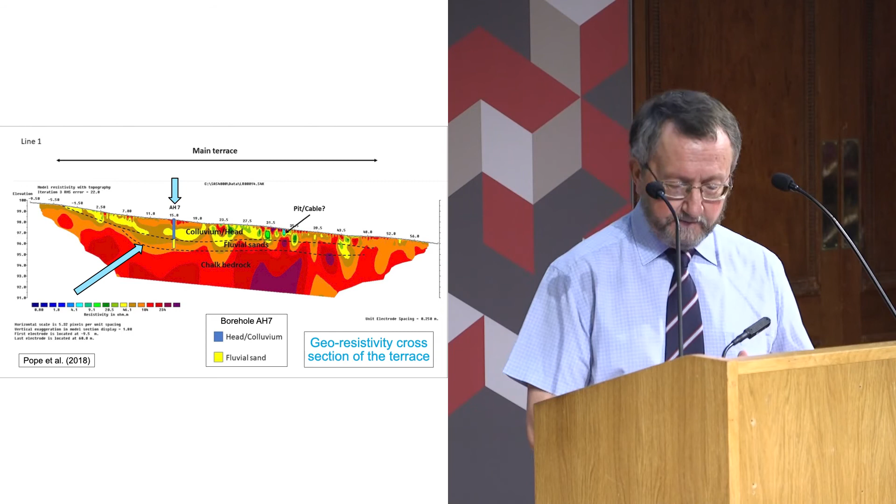Dearie me, I didn't show you that. I do apologise. That's what I've been talking about. I told you I'd get into trouble with these multiple buttons to press.

And the Rampion wind farm is offshore Brighton, as I said. And there are, in fact, two Rampion wind farms. There's the one that's operational, which Atkins has worked on. We did a lot of ground characterization work as input into the foundation design of the monopiles for the wind turbines. And that's Rampion 1, shown in the yellow here.

But there's Rampion 2. Rampion 2 is the next phase, and it's currently being investigated. And I have to say, it's not the size that you see there. It's going to be approximately the size of Rampion 1. What you see there is the outline of the environmental scoping area. So this is where a lot of environmental work is being done. It's not going to be covered in wind turbines. And I've got this from published work by Wood there.

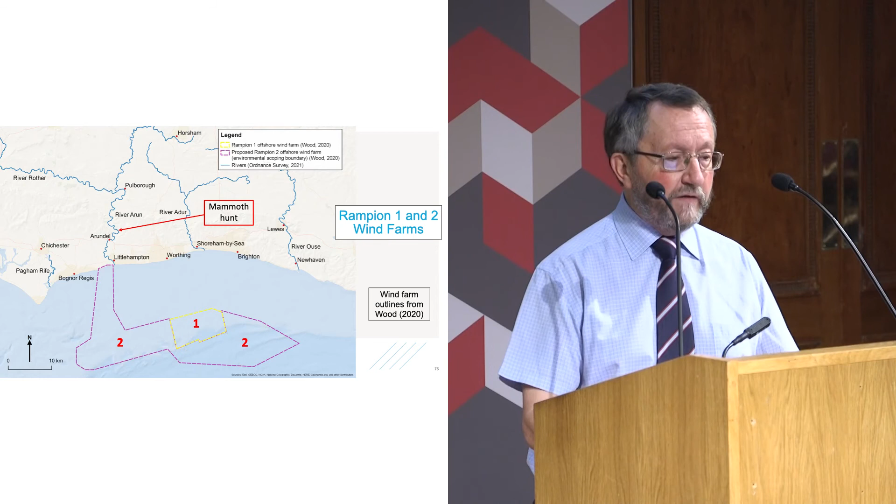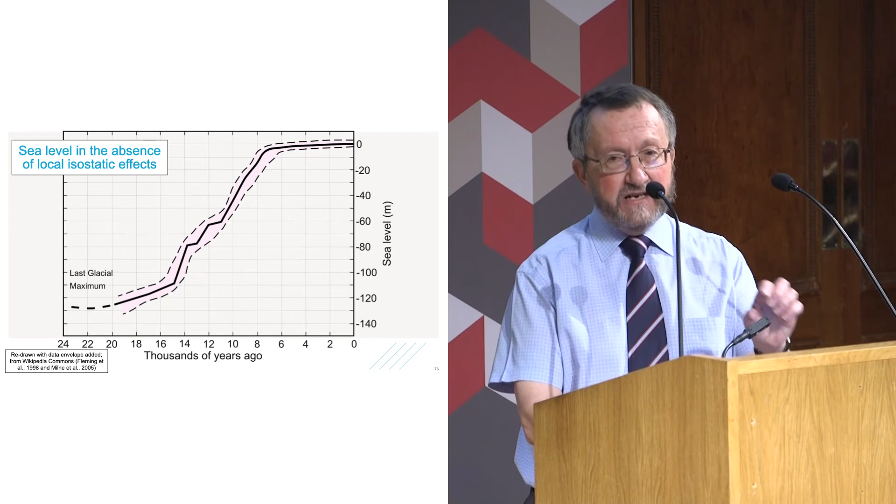Now, because we're dealing with the Channel, with the coast, we need to think about sea level rise. If we go back 20-odd thousand years, 24,000 years, we're in the middle of the last ice age, in the middle of the Devensian, the last glacial maximum. And during the last glacial maximum, the sea level was 130 metres below where it is today. And what this graph shows, which is well known, and I've given the references there, is the progressive rise of sea level as the glaciers melted. And we've just drawn an envelope around the individual data points.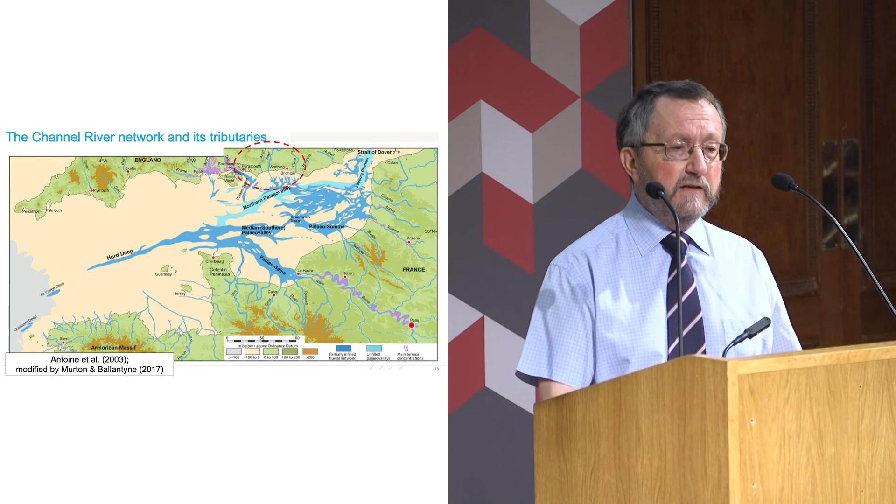This is what happens to the English Channel if you lower the sea level by 130 metres. It's all dry land. And the Channel has a very large river, the Channel River, a network of rivers, which collects the water from the major rivers of northwest Europe and indeed from Britain. You can see the Solent River there, perhaps, around the Isle of Wight, and the River Thames flows into this. We want to zoom in. We're going to go to the Rampion wind farm area.

Zooming in again, you can see the River Arun there and the River Adur, but there's something strange about this map. For some reason, and I don't know why, the River Arun doesn't flow across the seafloor, across what was dry land, and end up in the northern palaeo valley. And I think this is just due to lack of data, because the original work was by Antoine in 2003, long before the detailed geophysics was done, I suspect. And it's modified slightly by Murton and Ballantyne, but they didn't insert the river there. But all is not lost.

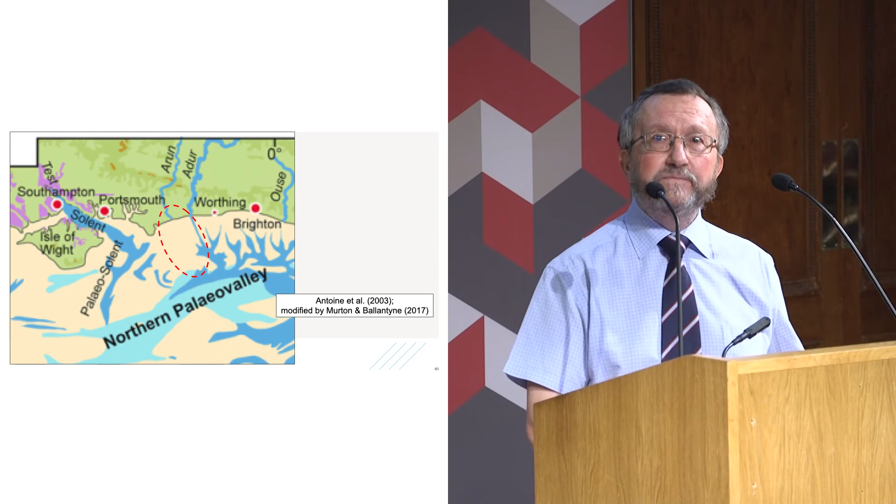So I've gone back to that original map. Now this is our work on the Rampion 1 wind farm. Those red areas are the positions of palaeo channels that we identified from many, many hundreds of kilometres of geophysics data. So these are the palaeo channels. This is what the rivers from the coast as we see it today will have done if they flowed southwards to the Channel River. But also I've shown here a little red squiggly line.

This is a line published by Professor Gupta of Imperial College in 2008. This is his assessment of the centre line of the Palaeo Arun. So the River Arun goes to Littlehampton, and then it works its way across what is now the seafloor, but would have been dry land, across the Rampion 2 area, and ends up with a little kick at the end.

Now, I can't use it, but if you were to go onto the internet, you will find other publications about Rampion 2, and some of them contain interpretations of the geophysics. And it looks just like the interpretations we had on Rampion 1. And furthermore, they show the position of the main channel of the Arun almost exactly where Professor Gupta placed it. So that's rather warming.

Now, the importance of these channels is that monopile wind turbines do not like being founded in the materials that are to be found within a river channel: loose gravels, soft clays, silts and peats. So the key point is the areas coloured in red are places where you don't want to put your wind turbine if you can avoid it, because you have to design very special foundations. So they are hazard zones.

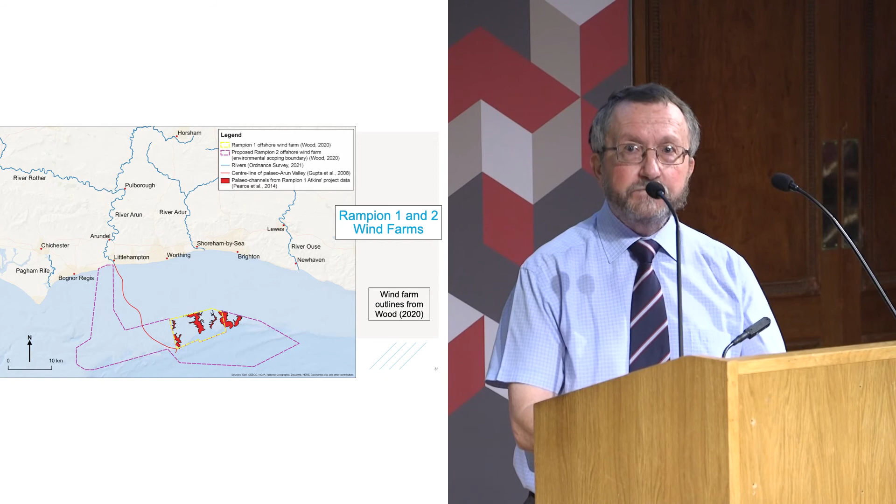So if we now go back to our sea level rise graph and we think about two time visits with a time machine, you could visit when the sand and gravel was being formed and try to evaluate those kind of conditions, and you could visit much later on when the climate is ameliorated, sea level is rising, and the River Arun is depositing clays and silts and sands and peats.

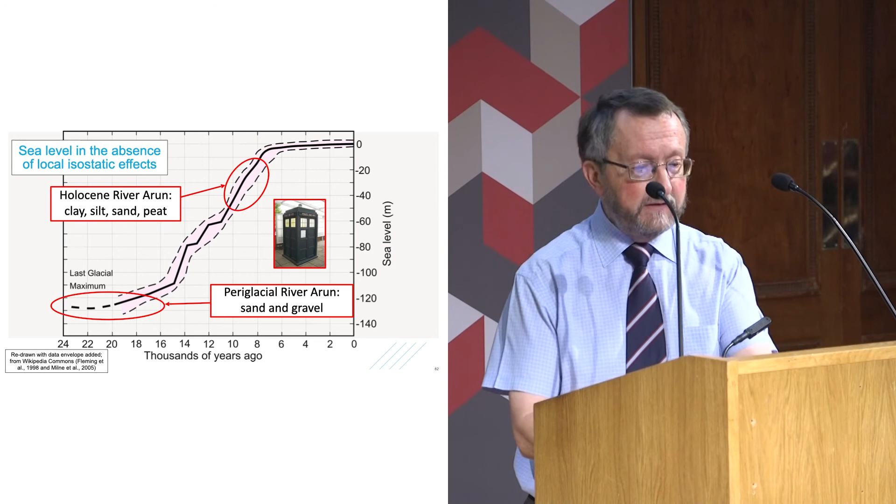So here we are, we're back in our time machine. That's the image I showed you before. Periglacial conditions, braided rivers, gravel bed rivers. But then we can go to the Holocene, and this is a Mesolithic period, if you're into archaeological periods. And I found this report: the seabed of the River Arun in the late Mesolithic. So this is a publication by Wessex Archaeology, who are an archaeological organisation that specialise in marine archaeology.

And I've shown on the right one of the river channels that we identified at Rampion 1. It's about 2 kilometres wide. So if we were to get in our time machine and land just in front of that little tree, you could have a talk with our prehistoric ancestor and look at this landscape. This is what the River Arun looked like, say, 8,000 years ago. And it's these conditions that the wind turbines have to avoid, because you can't easily have turbines built in those kinds of fine-grained conditions, including the presence of peats.

Now, when I was putting my paper together, I sent a draft to some colleagues, and one of them came back and said, one of the key points you must stress, David, is that communication is so important. The time machine is more than an aid to getting technical things right. It's an opportunity to blow the trumpet for science communication. It's a way of engaging people. And I think, as this author wrote as well, it's about understanding and thinking of risks and discussing them with clients. It's an engaging way of attracting their attention. Say the mechanical engineers don't know much about geology, but the kind of approach I've talked about, I've found to be successful.

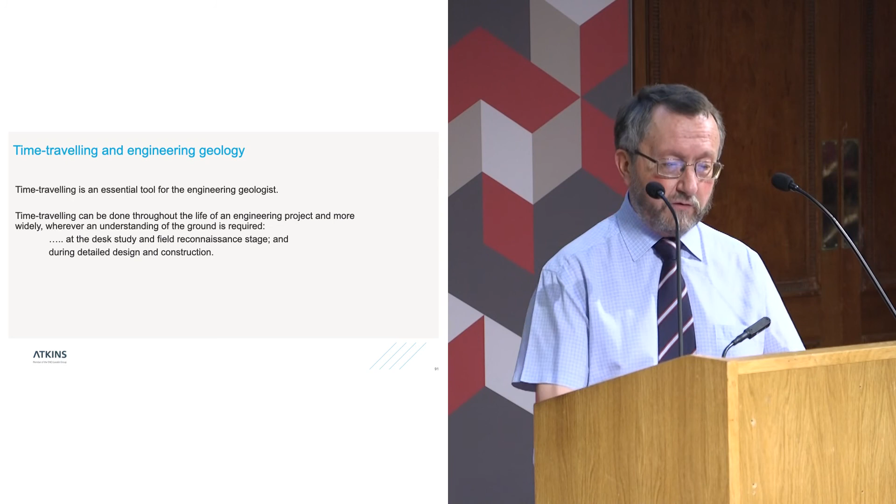So I believe it's an essential tool, and time travelling can be done throughout the life of a project. You can do it at desk study, at field reconnaissance stage. You can do it at detailed investigation stage, and indeed construction. And heaven forbid, you could also do it when things go wrong. So what skills do we need? Develop powers of visualization and imagination. Maintain a broad interest in the geosciences. Identify and understand present-day conditions and processes as analogues, and I think make really good use of case studies to engage interest.

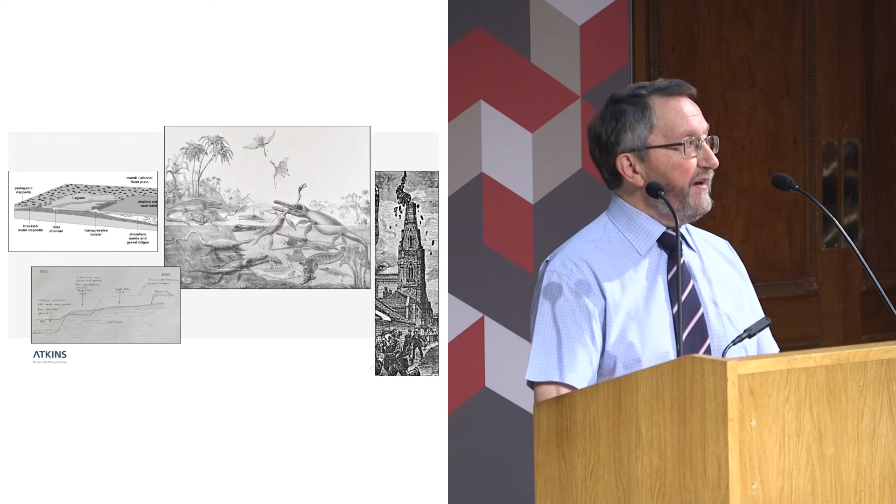So that's the end of the technical part of my lecture. So I just must say the thank yous. First of all, I must acknowledge organisations and people who have allowed me to use hitherto unpublished information. So the trustees of Arundel Museum and the Duke and Duchess of Norfolk, on whose land the Burpham investigation was carried out.

Barry Wilson of the Quarry Company in Devon, and Paul Andrews, who was project director for the South Tunisia gas line project. In my published paper, I'm going to reference everything properly and give proper assignments.

And very lastly, acknowledgements to people. In thinking about this list, I felt I had to begin with the people who were pivotal in my training at university. So Dr. Bill Cummins was my tutor at the University of Nottingham, and I spent a year after that at the University of Cambridge studying archaeology under Dr. John Alexander. And I use that knowledge frequently. It's just part of the way I'm wired, and I have a feeling there may be people in the room who are wired in the same way.

Professor Peter Fookes, of course, has been an enormous influence on my life. I've worked with him for many years. He was my mentor, a severe critic, and I'm pleased to say a friend. But 3 other Glossop lecturers have been particularly influential in my career: Mike Sweeney, who's in the room today, Professor Denys Brunsden, and Dr. Mike de Freitas, who's also in the room today. But also Mark Lee, who is again in the room today, I'm pleased to say. Mark and I, paths have crossed on a number of occasions, and I've learned so much from him about geomorphology, about engineering geomorphology, reading the landscape.